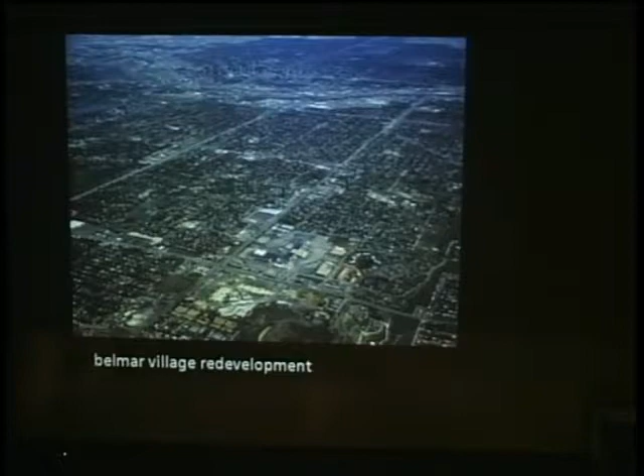This is 100 acres, there's downtown Denver. This is the suburb of Lakewood, a pair of arterials. This is a shopping mall that failed in a middle suburb, not a lot of buying power. We worked with a developer actually from New York to help them do the planning and buy this property. I'm running through a number of projects quickly because I want to get into some meat later.

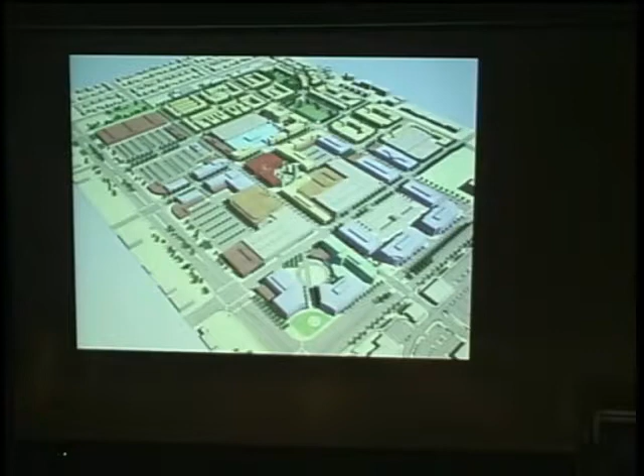We're developing a pair of focused streets - an important street here, an important street there. There's a series of parks, there are public spaces. We've been working on this for 5 years and now have over $10 million just in landscape construction underway on this property. It's all about taking a suburb and making it a little better. I won't really bore you with it, we've got pretty pictures like everybody.

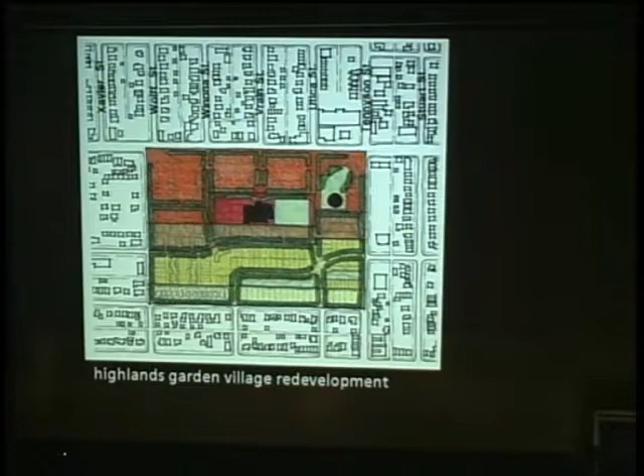This is an old amusement park, 26 acres in the middle of the city. You can see it's surrounded by existing development. This plan led to this plan. In the urban design piece, we study very heavily the sizes of lots and blocks, what different products go on different sites. This is an old theater, which is under renovation, and so on and so forth.

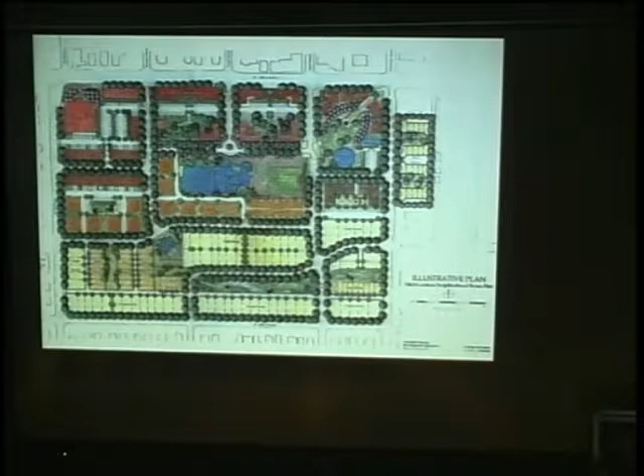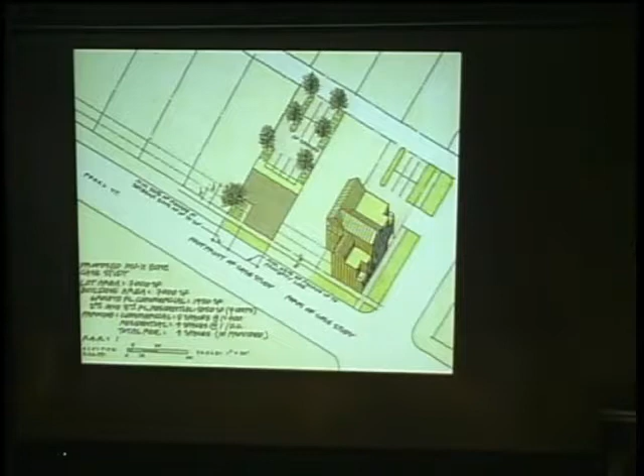Our urban designers develop a lot of work in design guidelines. We guide architecture, there's several architects in the firm. We do very site-specific design guidelines to make these places meet their expectations. They get built.

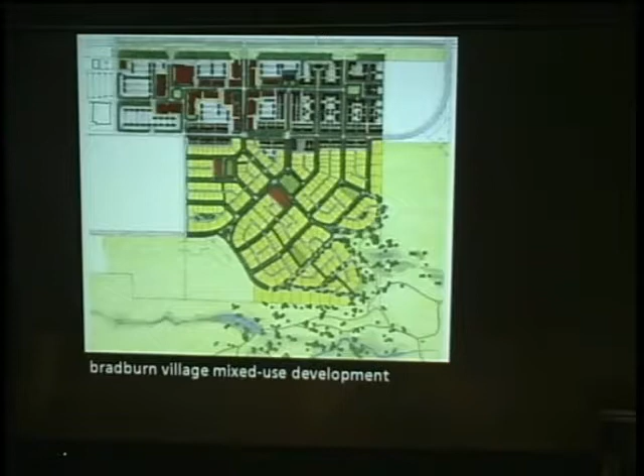This is another strip shopping center which failed, which we are taking and turning into a mixed-use community. I'm kind of just showing you that we're in this broader realm, and we have a variety of people who do these really lovely drawings in-house. It's very, very important to be three-dimensional.

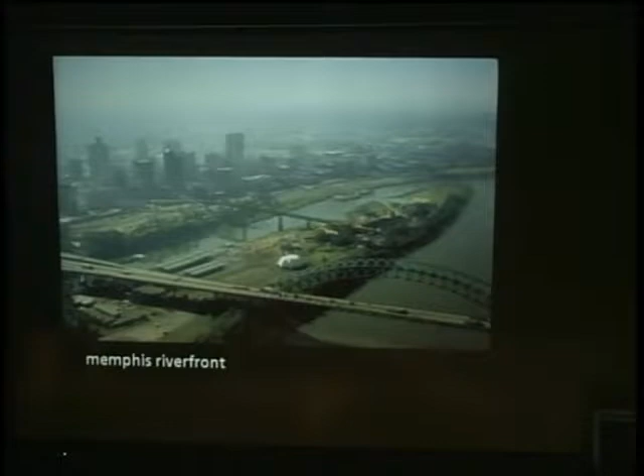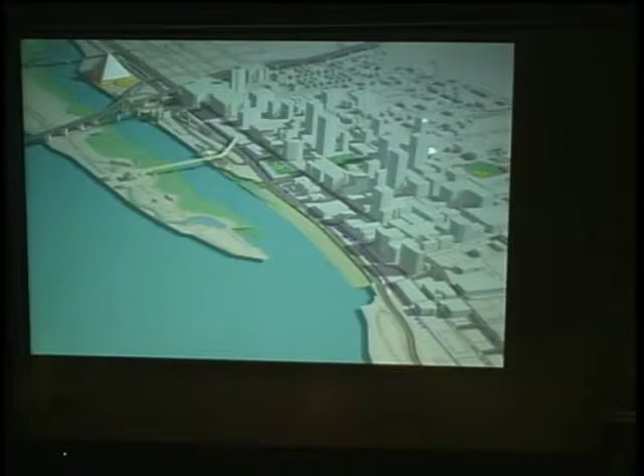Through a two-and-a-half-year process of public involvement and trying to create a vision, we have a plan. The plan was adopted this June by the City Council. It takes this high-speed arterial and stops it right here so we can eliminate this roadway and bring the streets of downtown Memphis to the river.

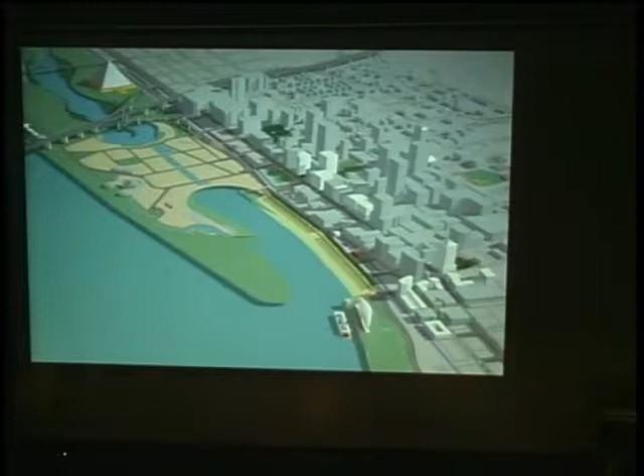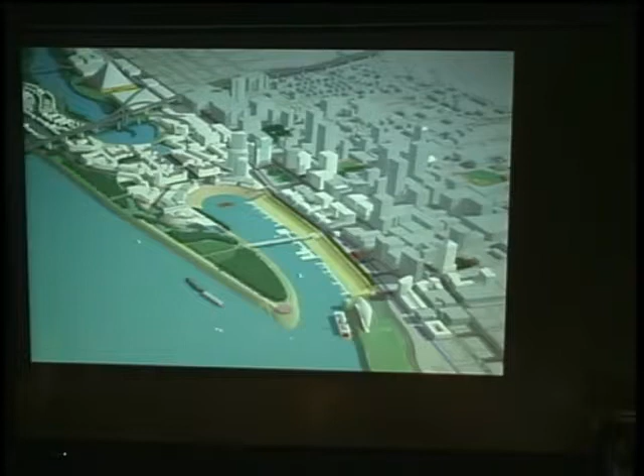It also entails a huge landfill because this is a dead-end waterway. We're extending 80 acres of filled land out to Mud Island, removing the existing museum, creating an inland lake which will become a neighborhood lake for infill development, and creating a brand new marina on a redeveloped set of original cobblestones, and a brand new park, a new landing for the Mississippi Queen. If you know Memphis, Beale Street is just right here, the music scene in Memphis. And this creates the opportunity for roughly 8 million square feet of new infill development.

As I said to the mayor the first time I came to Memphis, one thing I know for sure, we're not bringing the river closer to the city. So I think we're going to have to bring the city closer to the river.

Now, these drawings are kind of interesting, but if you've been out there, you understand what it takes to take an entire leadership of a city like this and convince them that they should spend roughly $250 million just on landfill and infrastructure to bring their downtown to the resource they have, and that's the river. This is going forward into schematic design of this element this fall.

A very different kind of project. In Teton County, Wyoming, I got a call one morning. I was asked if I could be in the governor's office the next Thursday. I went there and found that the governor had just announced the auction of a school section, 640 acres of land for development.

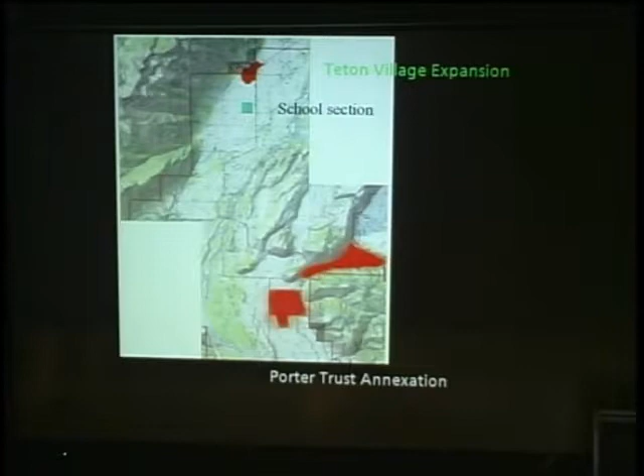Now, this is what it looks like today, and if you've ever been there, you can see that virtually all the development in Teton Village is on the foothills. This is the ski area up in here. My client owns all the flat land.

To make a long story short, here's the very first sketch, which we did the second day we were involved in the project. We postulated by getting these 11 groups together that—I hate golf courses, I'll be honest—but a golf course was critical to making Teton Village a year-round destination. More affordable housing was also critical to that goal.

The proposal we recently got approved here has 42% of the new housing units as deed-restricted affordable housing. There's a need for about 50,000 square feet of additional commercial because there's only boutique resort commercial. So of the 50,000 square feet we have entitled, 20,000 must be local service, grocery-oriented retail.

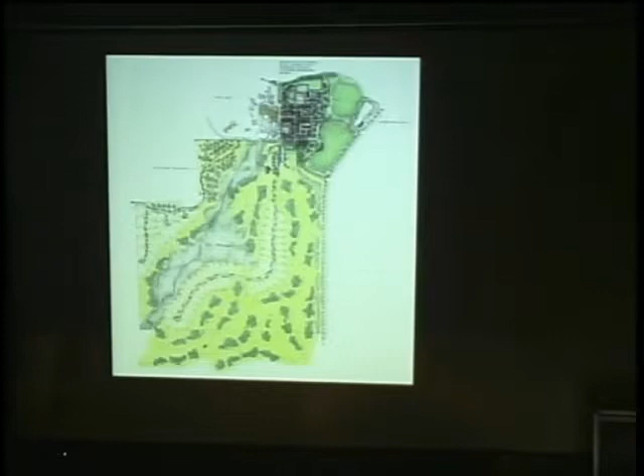Without going into all the facts and figures, basically you're looking at a plan here—the specifics aren't important. We're expanding the village, making it more mixed use, and so on. There were over 50 versions of this plan, and probably in excess of 20 public meetings that I led to build the entire community's belief that building here was more important than selling the school section, and so we have accomplished that.

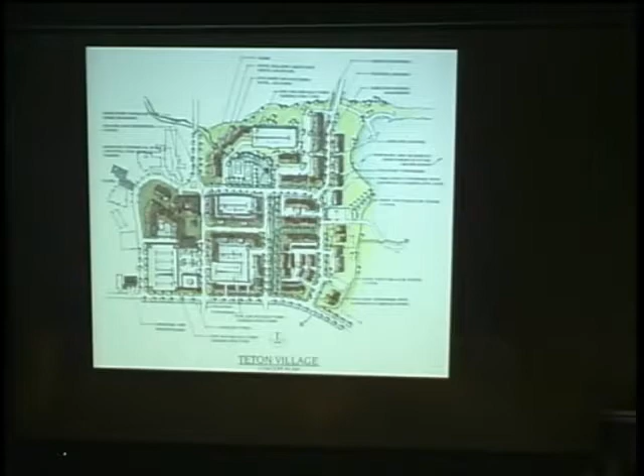We have gotten the governor to retract that, and this development is entitled. To show you how complex this is, the group of people we put together is offering $11 million for a conservation easement on the school section, so the state gets initial cash. The school section today is worth $29.5 million. The other $18.5 million come in trade land. We're trading the state roughly this amount of land, which our owner will then develop, the state will own, and over time they'll get their $18.5 million back. Because they'll own it, we've built an annuity investment for them. By owning urban development, the state has ongoing income, which today they don't get from the school section because it's fallow land. I know this is complex and convoluted, but when you get out there, this is what you have to do.

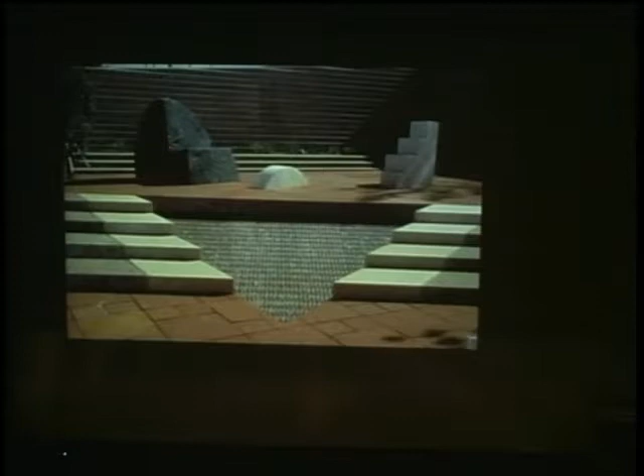This is probably our most artsy project, and maybe some of you have seen it. We got engaged with making custom objects and putting them into a kind of juxtaposition that gave a rhythm of movement, a lot of emphasis on how these spaces would be used and how they would be detailed. In some ways it's a very beautiful project, and a very expensive one, as you might guess. We had several trips to Italy just to pick and get stone cut and so on. In many ways this represents part of our history that I hope to leave behind, because it's a project from the early 90s. It's very didactic and object-oriented, and though photographable, not something I'm really that proud of. It's full of beautiful detail.

But what I'm talking about here, remember I said I'd talk about practice, is the development of a person's thinking as you grow.

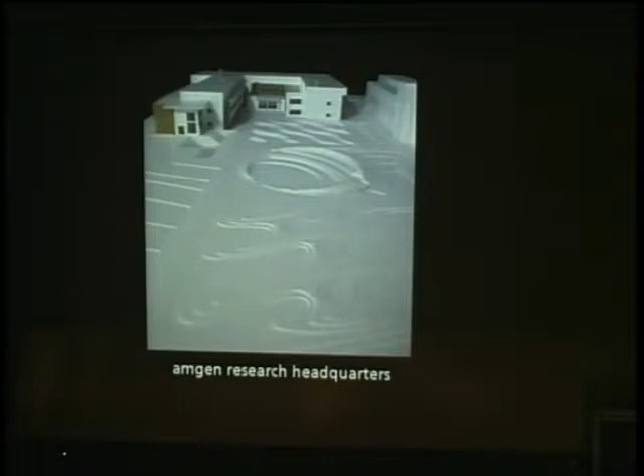Another one, from about the same period, is a research headquarters for the Amgen Corporation, the biggest biotech company in the world. We did a whole series of highly patterned gardens. This is right after it was planted, with native grasses and trees and so on. This is now gone, by the way. This is the only picture I have, because the client came back and built buildings there, and we've now made a new set of courtyards. Very unusual client—they spent over $2 million building our work, made a corporate decision to tear it all down, and built something else, and now we're working again. They have 250 acres. We joke around the office about how many times we'll do the same project.

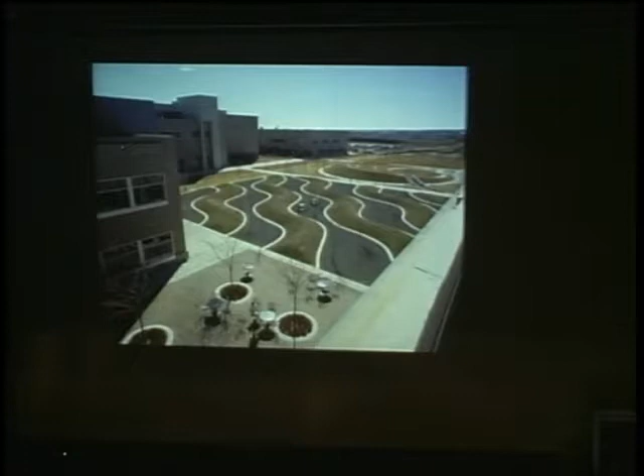We just completed a $60 million expansion for the Denver Botanic Garden to create a winter garden and children's garden complex, as well as some major circulation improvements within the facility. In starting this project, I toured 11 botanic gardens around the country, including 2 in Europe, and found that botanic gardens are largely disconnected from populations today. They tend to be plant museums or flower museums focused on flowers, and they don't connect well with communities. So what we're doing is shifting the emphasis of this garden to winter, because kids are in school then, and we can tie in the science programs. Lots of beautiful drawings, but this will be underway next year.

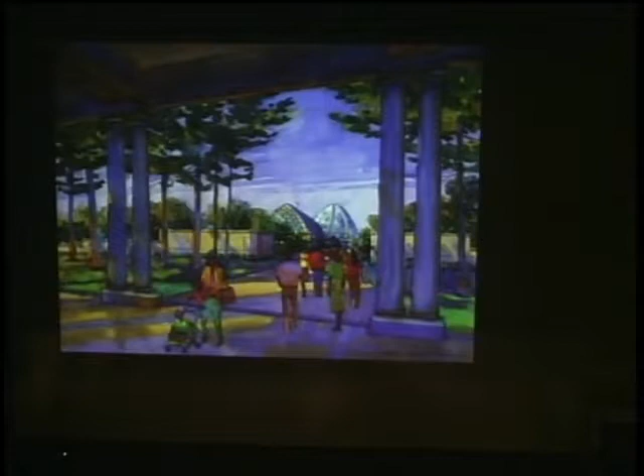We have dealt with a number of very large facilities. I led all the community effort to build this new football stadium in Denver—did the zoning, all the neighborhood work, all the site planning and configuration—and it's been successful. Fortunately, the team is winning.

Got to know John Elway. That wasn't all bad. He's a better football player than he is a speaker, I'll tell you that.

Lots of detail, great deal of community pride in this facility. Worked with an artist. Still, these things aren't that important to me. They're pleasant, but they don't have a kind of deep meaning. We keep learning. As you go through your career, you find you grow and grow, and you get less and less interested in things that don't have meaning to you.

There are interesting things. For example, the fire marshal required us to exit this building in 15 minutes, and required that those people be able to cross this bridge in 15 minutes. This is over a river. So we did the calculations and found that this bridge had to be 32 feet wide to accommodate 24,000 people in this 15-minute period. It's kind of interesting. I bet most of you wouldn't realize that you can calculate panicked pedestrian flows just like you can calculate freeway traffic.

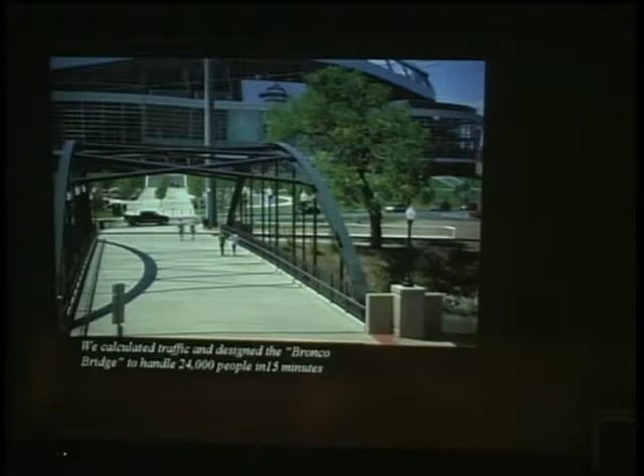Now, from that, I just showed you about 15 years of experience. We started focusing very hard on what do we believe in, what makes a difference to us in our practice. And we came to these three principles.

The answer is always in the problem, so we look deeply within the problem to answer the question we're being asked. We want to create places that are authentic, that resonate with people, place, and the economics of a situation. And the one that I made up, the last one: it's about them, it's not about us. We don't have a bag of style tricks. We are all about making places good for the people who will use them.

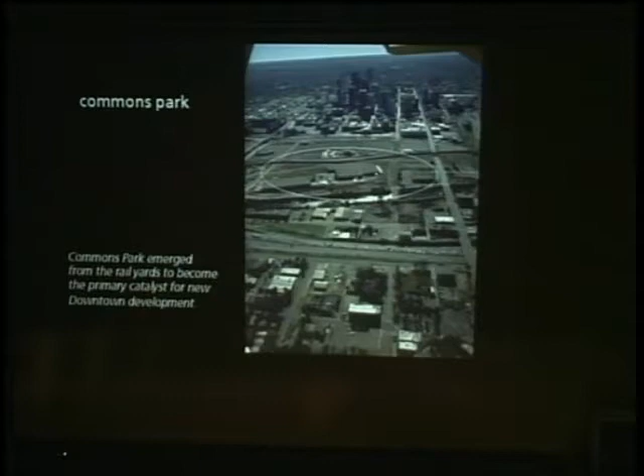The first meeting I had was with the head of the downtown organization and Charlie Gates of Gates Rubber Corporation, Gates Battery and Tire, and so on. They told me this would never happen, that it was my own ego complex and that this park would never come true. I told them that this land, the Central Platte Valley, along this little crack of a river right here, was the best opportunity that our downtown had to bring new people to live downtown. Because what a downtown needs more than anything is pillows, eyeballs, and footsteps — people living, working, playing, walking every day, day in, day out. And we were bound and determined to make this park happen.

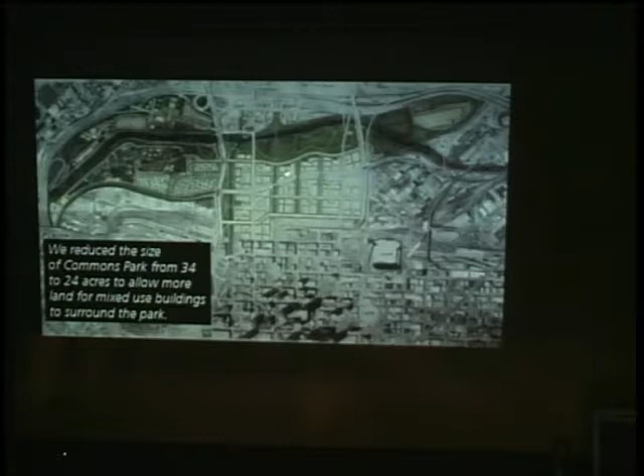You can see it here in the context, it sits right in here. There's our river, freeway, downtown. The question was, how could we extend the energy of this downtown to the river and make this a great place? We spent two years just sizing the park in this diagram, which is five feet tall and thirteen feet long, and it rolls up. The mayor carried this from meeting to meeting over those two years: 'Here's my park, here's my park.' Number one, excite the mayor.

We developed this in 7 public workshops that involved as many as 30 people in each of 7 workshops, with wide and diverse groups of people playing with pastel drawings. These are just people from the neighborhood drawing pastels, playing with clay.

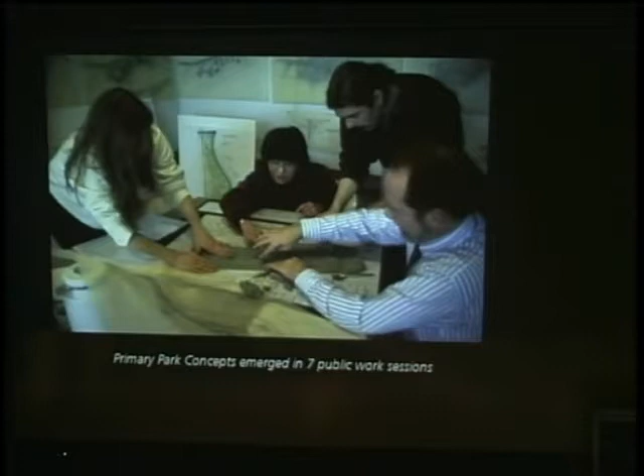What we're doing here is not designing the park per se. We are engaging the public in making this park so that it is theirs, so that when the time came for this to become real, the constituencies were there.

4 years after that first meeting with him, he gave me a check for $8 million of his own money to help buy that land. And ultimately, we spent $26.8 million building this park.

We drilled computer tracked borings into the water table, 12 here and 12 in a native wetland about 20 miles downstream from here. And what we did with our plant ecologists, for a 3-year period, we took tapes of the water fluctuation, and then we looked for the relationship between groundwater fluctuation and plant community.

We then did the grading plan for this site, built into different terraces, and planted it with the plant communities that associate with those groundwater tables, which we knew to exist here.

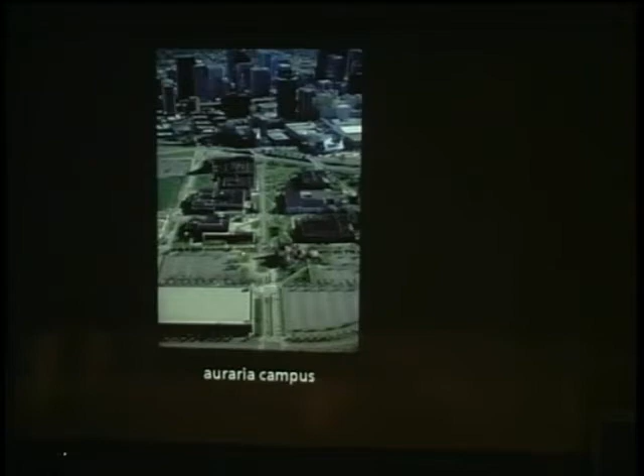We did the master plan for the campus and said these streets must be closed. This is what it looked like. Same place—here's the inbound highway, outbound highway. About 30,000 cars per day came through here. Notice this little church, little Latino church right here—you'll see that again.

What we did was we built a building on this site, and we left the front of it. We built it 16 feet from the highway, and we left the front of it gravel. After the building opened, we invited the Joint Budget Committee of the legislature down. George Hoover is the architect of this building, and myself, and we stood there and had breakfast on the gravel, and let the legislators watch 36,000 students try and cross 30,000 cars.

It's no exaggeration—at the end of that breakfast, they gave us $27 million for campus improvements. One breakfast. A little bit of politicking.

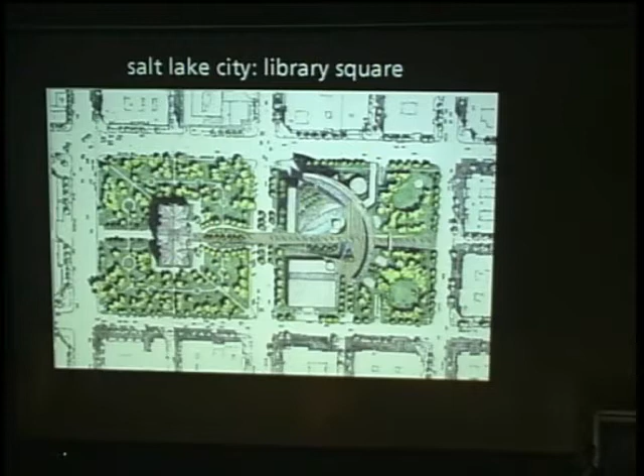Affordable housing was a bad idea on this property. The real problem in this neighborhood, we learned in 7 public meetings—we did a neighborhood analysis of about a 30-block neighborhood, and we found that the zoning was a problem, that the economics were a problem, that transportation was a problem. By doing a neighborhood plan, we came back and showed people that open space was a better benefit to their neighborhood than affordable housing.

The plan looks something like this. There is, again, here's the building as a reflecting pool. This is intended to be Salt Lake City's great civic plaza.

If you know Salt Lake, it's a community with a lot of dialogue between members of the LDS Church and people who are not. Most public spaces in downtown Salt Lake somehow end up co-opted by private interests, either church interest or property owner interest.

There really isn't a truly public gathering space for events and festivals. So this space I'll be showing you has now been designated as the primary secular gathering space for Salt Lake. It will host the Utah Arts Festival and roughly 14 other major events through the season.

What we've got is a plaza made 100% out of stone, all coming from Jerusalem, Israel—beautiful stone. A descending wedge, which is a patterned garden, with this kind of diamond pattern. This garden is being taken over by Red Butte Botanical Garden and operated as their downtown botanic garden.

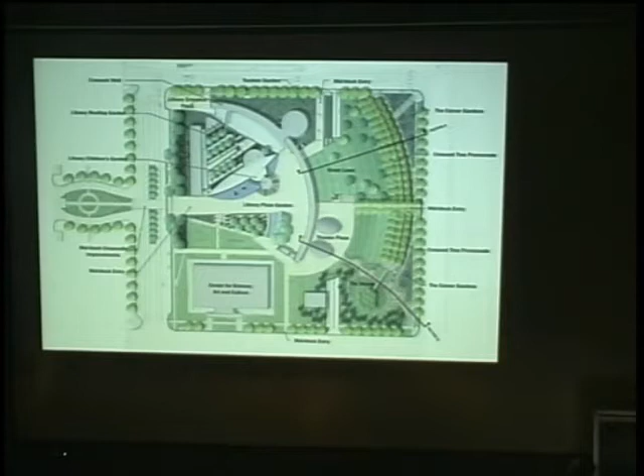A major water feature, and this entire wedge is descending into the ground. There's a wall about 7 feet high—this is low and that's high. That will make more sense later. Then it expands to a park on the east.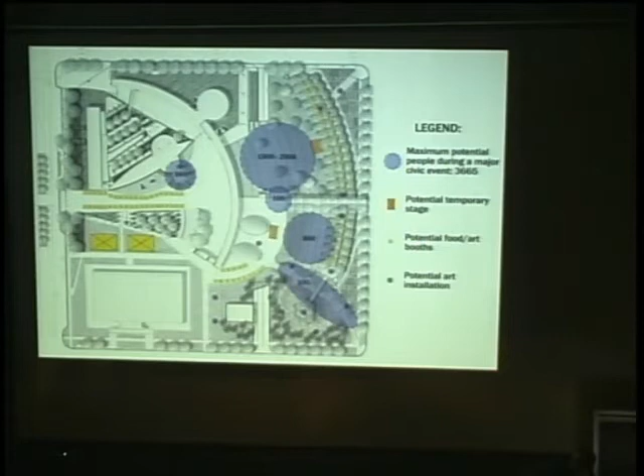Through public meetings and efforts with the different constituencies involved, we defined a series of 5 major event locations. For example, this can accommodate a temporary band shell and 2,500 people, and we can have readings for 165 people here and so on. There was a great deal of negotiation around this topic.

Here you can see, I hope this reads, how this is the library behind, how this wedge rises out of the ground on one end and descends at the other end to this very large water feature. The water feature is 14 feet high and 80 feet long.

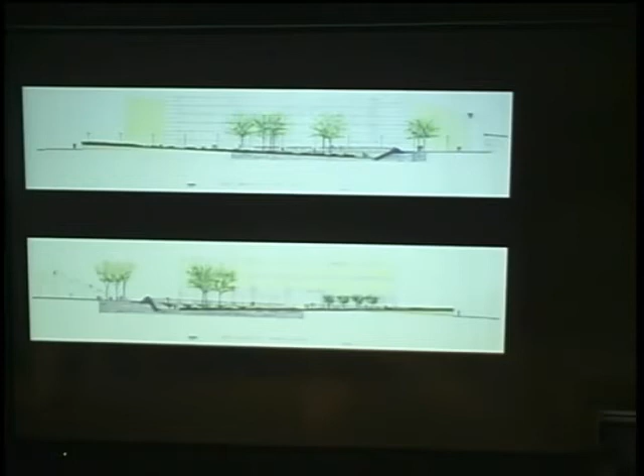Here you see it in 3 dimensions. This line represents the hinge point between the grade and what's rising and what's falling.

There's a hole right here, and it's the only place on this entire site that's not on structured parking—all the rest of the site is above structure. That's why we've tipped the ground down, because we're able to use real soil there. We'd have no loading problems because we have 1 million pounds of stone right here.

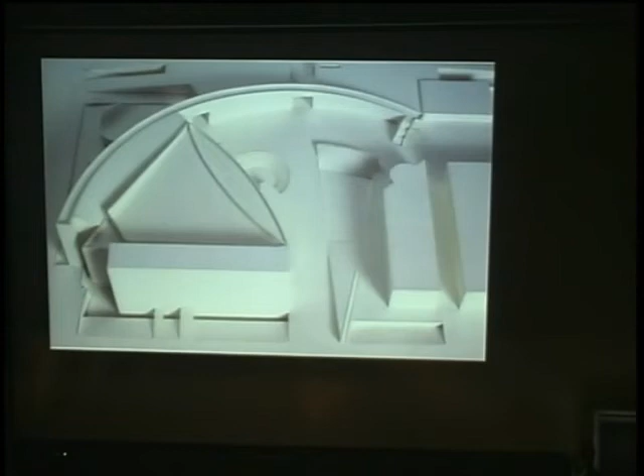The water wall itself has water gushing down this side, virtually dry here, in this interesting splay fashion. It's about 80 feet across.

It's under construction. I thought it would be interesting for students to see what it takes to put a project like this together. Here's the amphitheater—remember I said 165 people located here. This is the children's library, which is underneath the reflecting pool with skylights.

We've designed a pair of water walls with continuous water running down, so kids can sit in the library and actually stick their hand through a sheet of water.

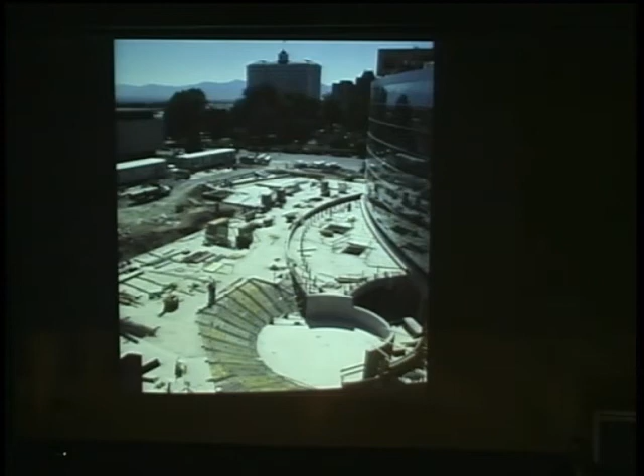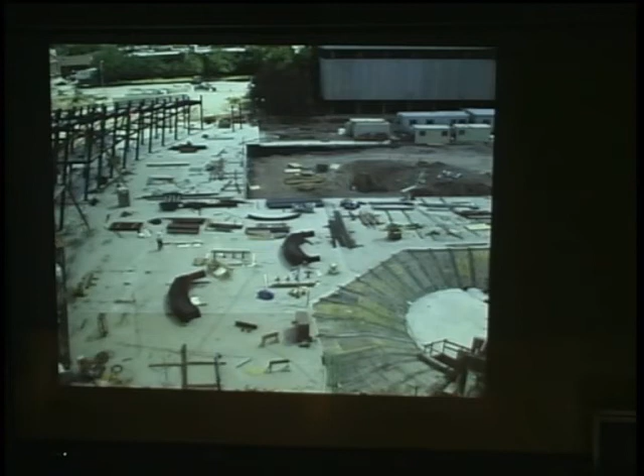Here's the hole in the ground that I talked about, and the beginning of formwork for the major fountain. You can see the tail of this giant wall, which is canted like this, and it's a spiral.

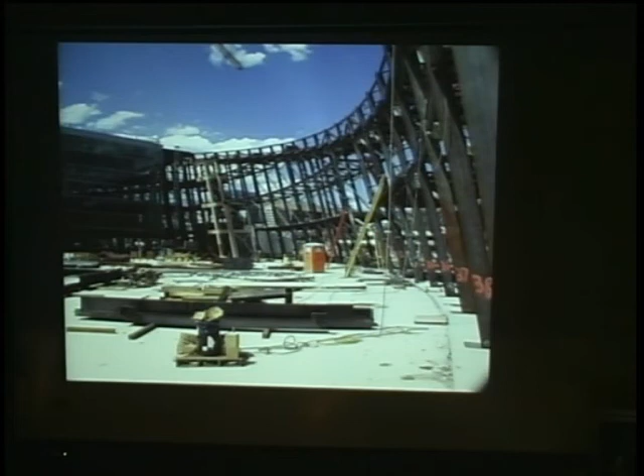It's absolutely fantastic. The entire bottom floor, this first floor, is all shops right on into the library space, and this level here is the mezzanine. In a moment, if you remember this picture, I'll explain what happens on that mezzanine. This is what it's like being on top of this wall.

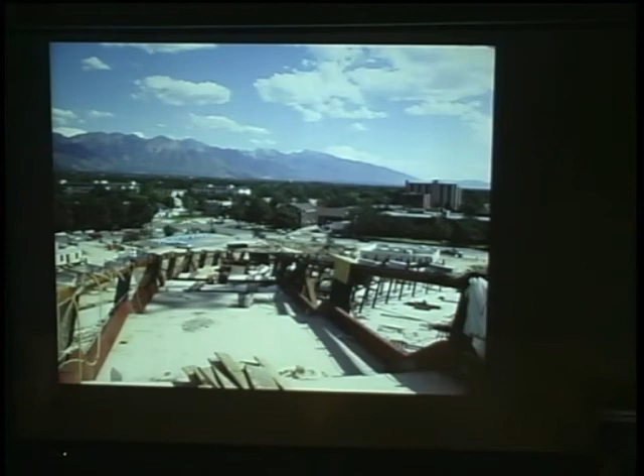So that was actually all under construction before we got to design the second half. It's 2 parts. Besides this grand promenade of shade trees as a place to sit, the lawn slopes up 18 feet.

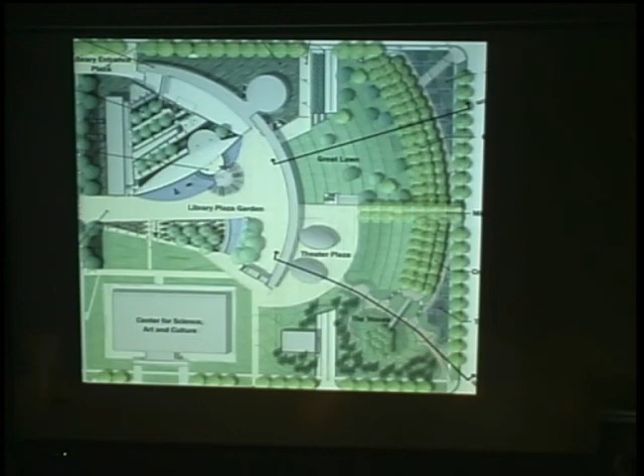You'll be able to walk from the sidewalk up the lawn into that mezzanine and look down on the plaza from the second level. The other lawn slopes the other direction, giving a sense of enclosure for events in this location. Then this descends down—this is a high point—down under a bridge and into the plazas from behind.

I have more that I could talk about, but I thought I would try and be quick because I really like questions and discussions. So I'm just going to end right there for now.